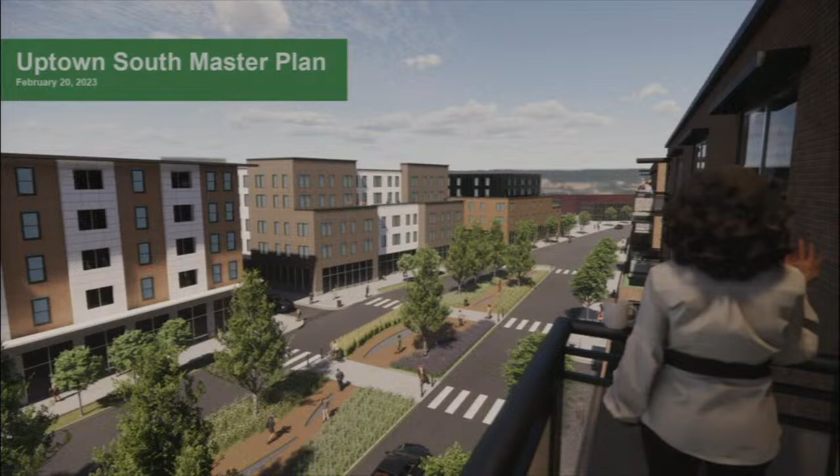For anyone who's been involved in the process to date, show of hands in the room, who's been involved in prior meetings? A lot of folks. How about first timers? Nobody. So everyone, this will all seem pretty familiar except for this cover rendering.

So we wanted to have some sort of image that described the public space, the principal public space that the plan proposes: 5-story buildings on both sides of a kind of divided parkway. And so you can see the rendering here. There's two women kind of waving at each other, balcony to balcony. On the right-hand side, the image is a little dim, but you'll see that again.

So I want to take you through seven items and then Q&A. I'll just take you through it. So the project background, I think this is known very well to people in this room.

There have been plans prepared for Uptown before it was called Uptown, starting in 1999 and 2000. They were updated in 2015 when a significant portion of the plan had been developed, but the market had changed, and so that was called Uptown 2.0. And then with the arrival of Rivian, the change in the economy, all kinds of things, it made perfect sense to dial in Uptown South again, beginning in 2022 and then sort of finishing this year.

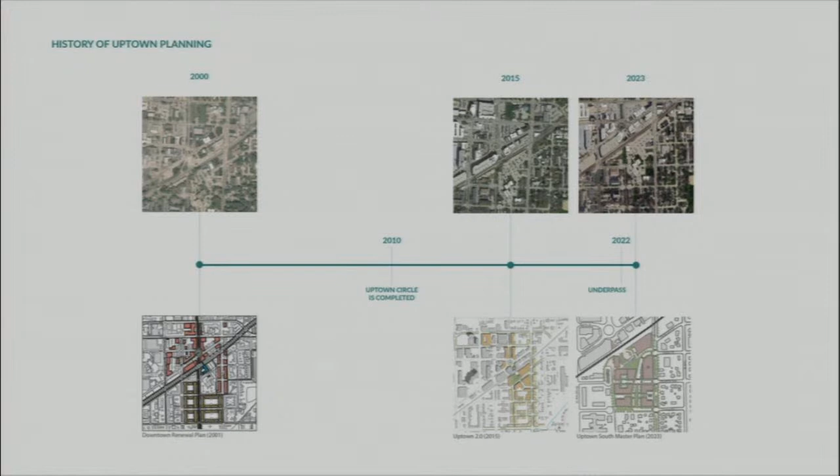So you can see the aerial photographs across the top of how facts on the ground have changed, as a result of the plans, and then the plans and their evolution across the bottom.

So sort of two big things to know is that, why are we here today? The 2015 plan called for the creation of an underpass, which is underway. It's being designed and constructed, and people in this room know far more about it than I do. What's most significant about it is that Uptown itself, north of the tracks, is fairly close to being done and complete.

With Trailside East and Trailside West, we're kind of running out of new stuff to do. So it makes perfect sense to extend Uptown to south of the tracks, and the underpass will do that in the most pedestrian and bike-friendly connected way. So it's pretty amazing feat that the town has found funding to do that.

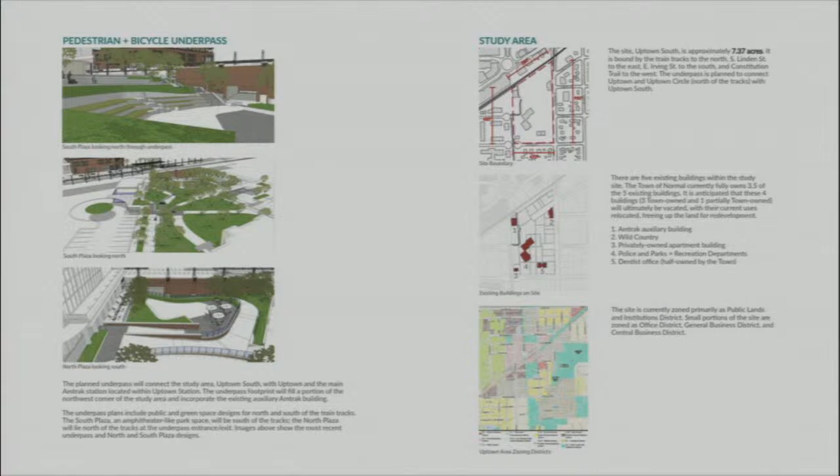So the study area pictured here on the right - the cursor doesn't really show it. Anyway, the study area is 7.37 acres, bounded on Linden to the east, Irving to the south, and Constitution Trail on the west. And it's got 5 buildings on the site, and we'll take you through all that.

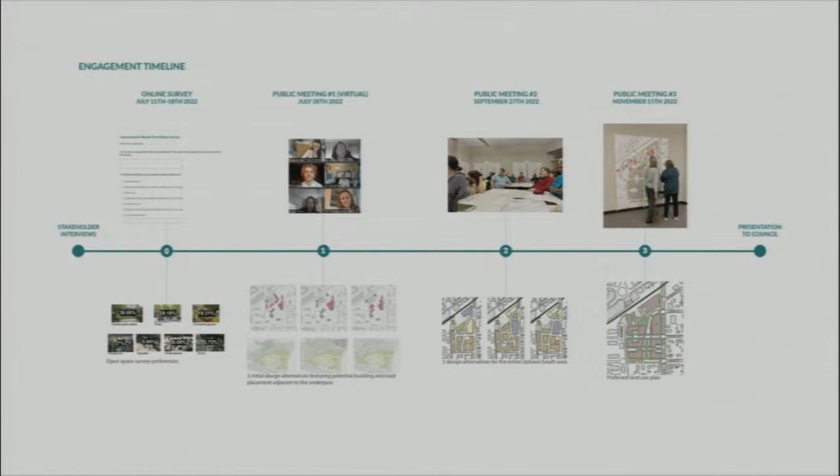Then in the virtual meeting in July, we showed 3 different ways to enclose space adjacent to what's called the South Plaza. In the September meeting, we showed 3 completely different schemes, and we got a lot of feedback, and people told us what was working and what was not, and then the November meeting sort of pulled it together.

So, market opportunities. We wanted to share that our sub-consultant, financial consultant SB Friedman, did a thorough market analysis, and we found pretty much only good news. The housing market in McLean County and Normal in particular is very tight, which is, if you're a landlord or wanting to build housing, that's a good thing. If you're trying to find housing, that's not a good thing. But prices are up to the point where new construction seems to be justifiable.

The job growth, as you know, from Rivian and suppliers and everything is on a strong trend. So anyway, the facts go, basically non-student rental units have been rented up almost instantly. The price to date at $1.79 a square foot is not quite at the $2 per square foot threshold we look for to justify new construction, but with the amenities that are proposed here, I think we'll get there.

There's lots of demand for housing, and then finally urban style housing—that is to say not detached single family, but typically multi-story apartment, elevator sort of buildings, and other missing middle types of buildings. So coming back at it again with multifamily, Rivian's added 800 jobs during the year 2022. The population is growing, trends are good, and student housing, if we wanted to go there, is also a further demand factor.

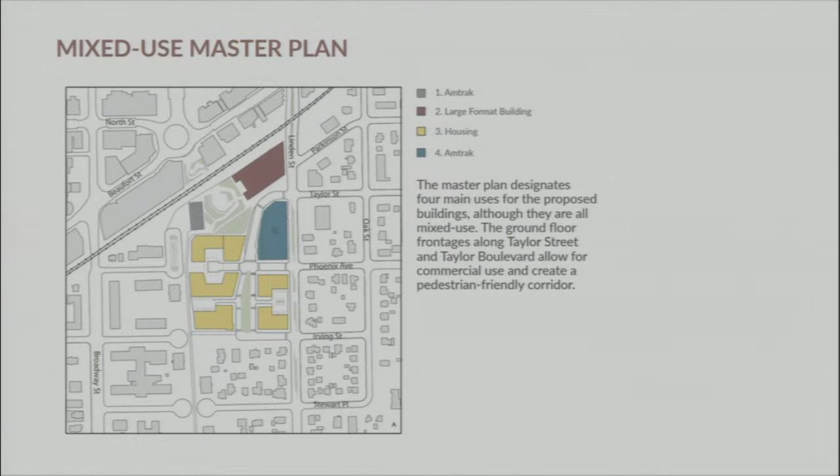The upper right we're calling the large format building, which is adjacent to the tracks, and we have 3 possible uses for it. The yellow is housing, and there's sort of mixed use and housing buildings, 5 of those over 2 phases. And then finally, mislabeled here as number 4, Amtrak, is really a mixed use parking structure. So that's the kind of blue there right off of Linden.

So the first one, the Amtrak building that's there can be replaced and intensified with a multi-story building. It's a very small footprint. It would happen towards the end of a phased master plan, but we don't want to miss the opportunity to call it out.

In terms of the large format building, we looked at it for 3 different uses. One is a large institution like a library, or potentially a retail space. Second is housing. And the third—Olivia, what is it? Different format? There isn't a third? Okay, just 2. These are all different configurations.

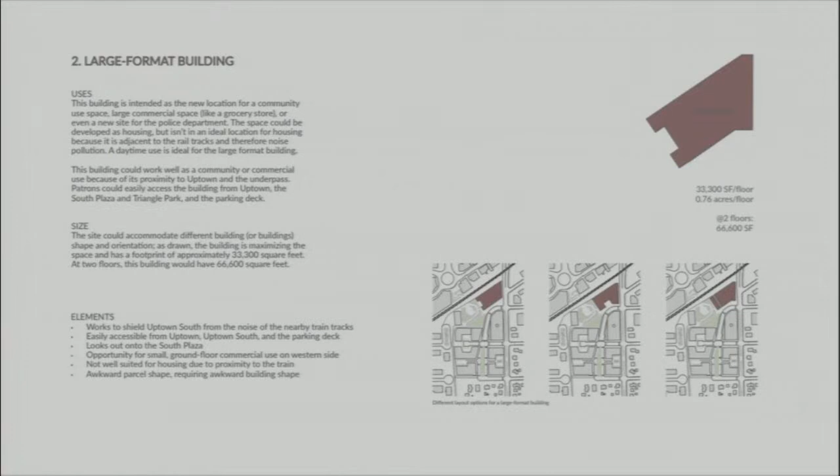So housing, 5 different buildings in L shapes or U shapes. They total across 5 floors, 402,000 square feet, which is a lot of square feet—so that's hundreds of apartment units. We are proposing ground floor retail uses, particularly facing the new boulevard, and then upper story housing. We imagine all of the buildings will be elevator served to meet accessibility requirements and just to meet the market.

We'll show you in a minute the 3 buildings on the left, that stack of 3 buildings there would be in phase 2, and those can only be built if and when the municipal building is relocated. And then the 2 on the right can be built anytime.

So parking is the 4th land use, and this one probably got moved around more than any other. It's this site adjacent to Linden that ended up being kind of the one that wanted to be there. It wanted to be really next to the tracks, but we could not figure out how to get in and out of it in any kind of sensible way.

We needed more points of entry in and out of the garage. It's a tight footprint, but it fits, with a little bit of room to the west for a liner building. You can see we've gone to the level of detail of showing where the entries and exits are.

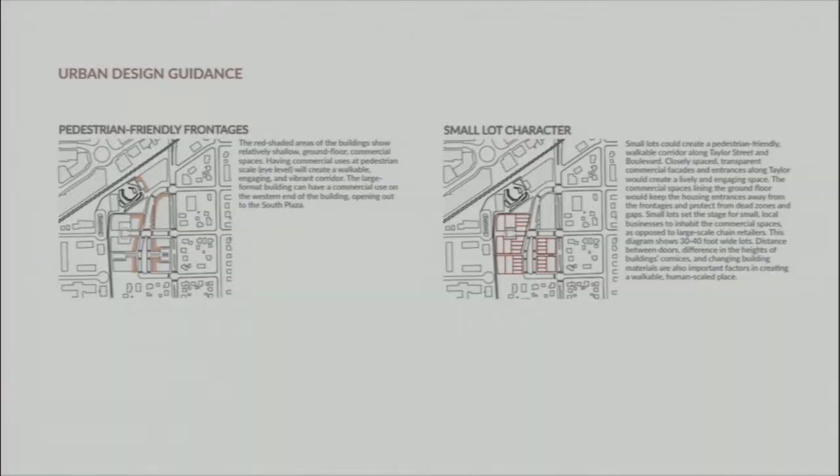On the right-hand side came out of the original survey from June and July, where we asked what the preference was: big buildings, little buildings, or middle-sized buildings like the fine-grained character of Uptown now, which was based on the idea of respecting the historic 30-foot parcels. So if a building has multiple facades, you're carving it up into smaller bite-sized bits. We propose that same thinking along our new north-south street, which needs a name—I'd name it after several people in this room, but it's not my call. We'll come up with some good names.

For open space, there was a lot of interest in getting the open space right. We worked with Jason Cooper at ECT Landscape Architects, and he did some lovely preliminary landscape plans for four open spaces. I'll take you through them one at a time.

Here they are in the upper left, numbered and named: the Triangle Park, the Taylor Boulevard Parklet—though I don't think we can call it Taylor Boulevard, but that's our holding name for now—the Courtyard, and then the Constitution Trail, Irving Street path.

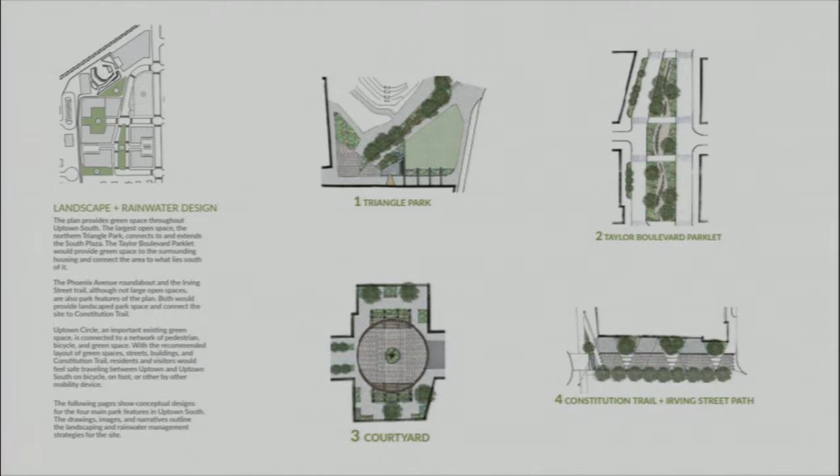First is the Triangle Park. Looking at the plan on the right, you can see the Amtrak tracks. The underpass project comes with a public space called the South Plaza, labeled there in small print. Below that low line of trees, kind of a hook shape like a Nike swoosh, is the Triangle Park. We took a very nice proposed public open space that's going to be built next year and expanded it by adding a triangular saddlebag shape on the bottom.

We envision this as a kind of multi-use lawn or flex space—sit, roll out a blanket, throw a Frisbee, walk the dog, all those kinds of things. Much needed in Uptown South, since there just isn't enough open space for everybody's enjoyment. So we're taking something great and making it a little bigger.

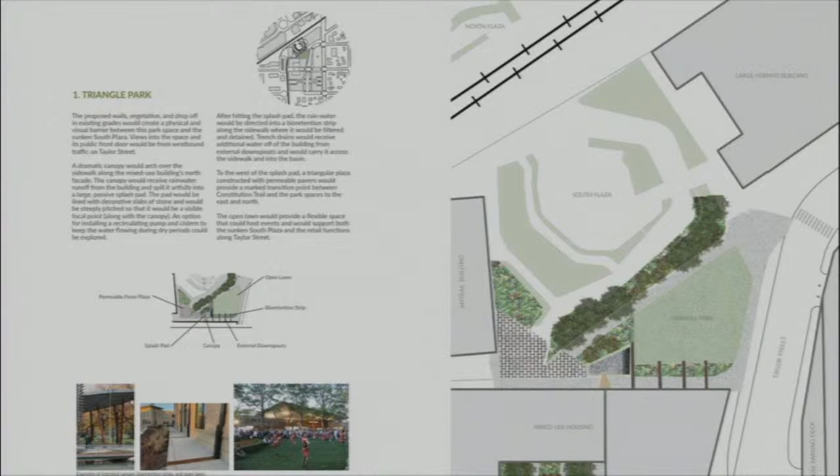Second, at the master plan meeting in November, there was a strong push for additional park space to the north as well as to the south. The one that made sense to the south is what we're calling the Parklet, the Taylor Boulevard Parklet. It's a divided parkway, not unlike Constitution Trail, but we widened the street to get adequate area in the middle.

Jason, the landscape architect, illustrated this with a series of trees, north-south pathways, bioswales, and rain gardens—you can see reference images in the lower left. We see it as a stormwater facility, continuing the legacy of Uptown, which is nationally famous for what it's done with stormwater. We didn't want to just make another circle and plop a fountain in it, but wanted to sustain those same values of stormwater retention and best management practices.

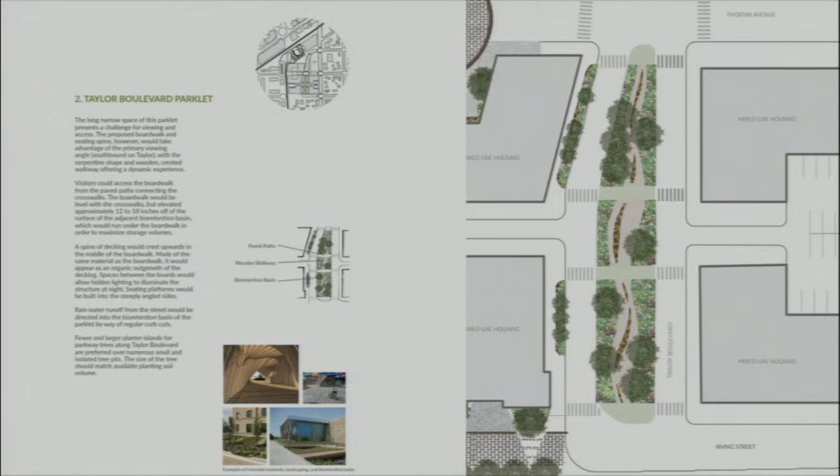That's that one. Number three, the Courtyard—rather than have just regular streets, it makes sense that the streets approaching Constitution Trail should go from vehicular streets to a more pedestrian plaza-like character.

So these two mixed-use buildings can only be built once the municipal building is relocated to make way for it. We've faced the two C-shaped buildings towards one another to create a common shared courtyard. This allows the town's standard for cul-de-sacs at 92 feet, which is about 42 feet bigger than it should be, but that's the law. So if the engineering staff wants a 92-foot circle, we've got one for you, but hopefully it'll be smaller. If an emergency vehicle wanted to come down this short, stubby street and do a 180, it could do so. So public safety is met, as is walkability.

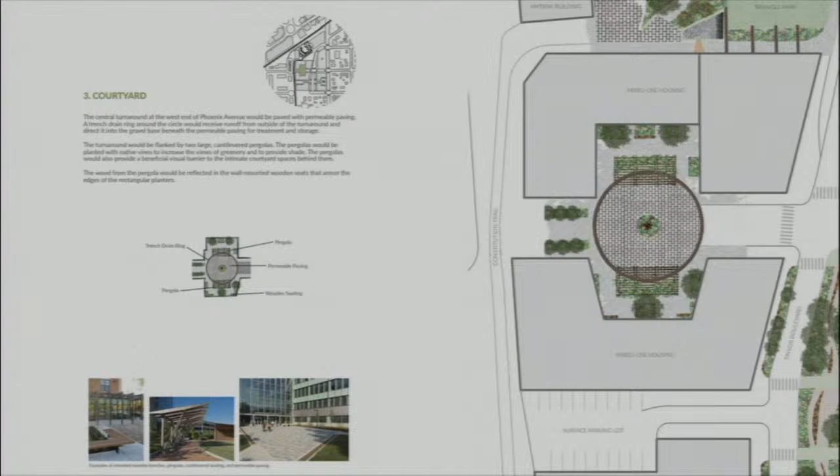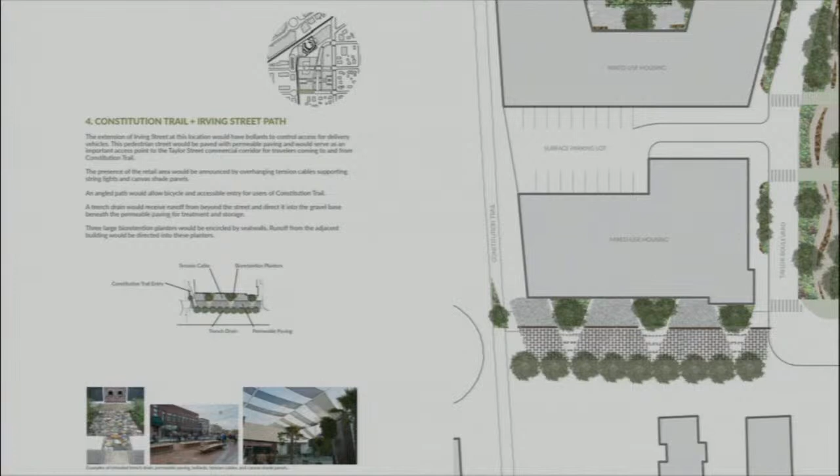And then fourth, the Irving Street continuation. Rather than run a street to Constitution Trail, we're proposing it as a plaza. It's a multi-purpose plaza so that vehicles can travel on it—a kind of pervious hardscape. We propose this as a pervious paver street so that it does a stormwater retention function as well.

So those are our four public open spaces. We can talk about those in greater detail if there are questions.

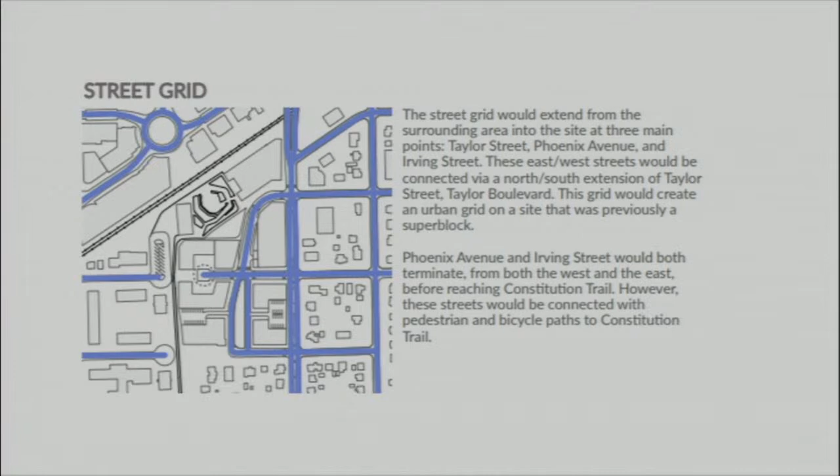Mobility: we worked very hard to integrate and connect to the street grid to the east. You can see we've got loop roads and two dead ends that approach Constitution Trail. We decided early on, and it was confirmed in the community process, not to encourage vehicles to drive across Constitution Trail. In the early phase, getting out of the police station, there's a cut across there, but I think it goes away or becomes minimal in the second phase. It's a nice extension of the street network, acknowledging that we really don't want streets crossing Constitution Trail. So that's the street grid.

Bike network—bikes are going to be key here. With the underpass, you'll be able to bicycle along Constitution Trail, come from the north, around the circle, duck under the tracks. You'll be asked to dismount, so keep it safe, people. Then you can continue south on Constitution Trail and feed into the Constitution Trail linear park on pretty much all of these streets. Some are dedicated bike lanes, some are share lanes, but we see it as a kind of walk, bike mecca.

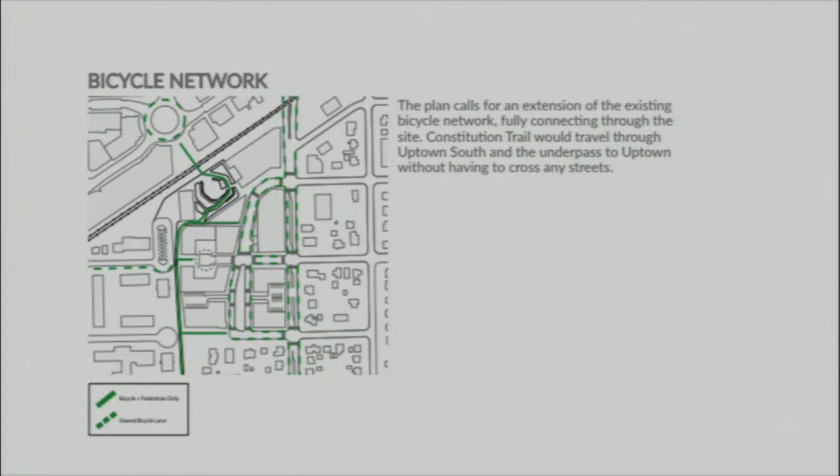Is the person that suggested that here tonight? Who was that? There she is—okay, Karen, thank you. I was thinking it was you. Thank you for that. That was great—and you introduced it like, this is a secret, don't tell anybody, I do this all the time.

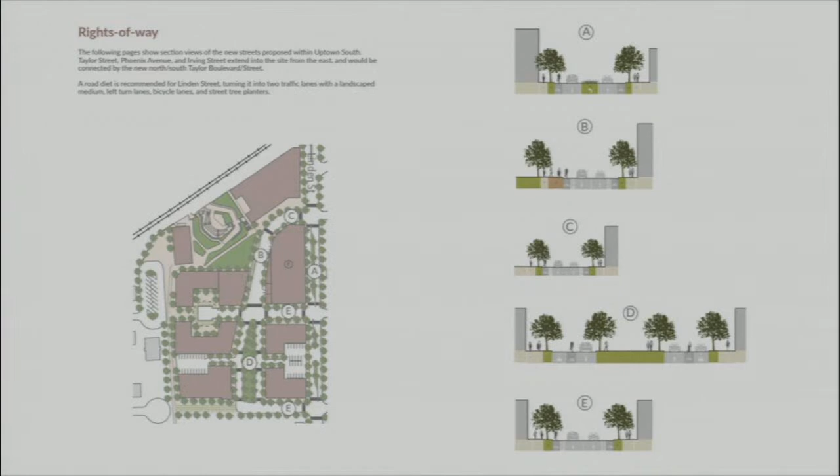So rights of way is the name planners give to streets and the adjacent public space. Here we've got 5 different ones. This is a callback to 2015—a certain council member reminded us it's important we not fail to repeat the recommendation from 2015 that Linden do what's called a road diet.

A road diet is a commonplace occurrence in municipalities that have 4-lane streets, 2 travel lanes in each direction, that more often than not carry the same capacity of traffic at safer speeds and with other amenities like wider parkways and/or bike lanes.

This is a proposal from 2015 we're reheating and representing. It's a really good idea, consistent with the rest of the plan. The existing conditions are on the bottom—4 travel lanes, 2 northbound, 2 southbound—and we'd replace that with this section on top, a center median with 1 travel lane in either direction. When there's a left turn, you interrupt that center median.

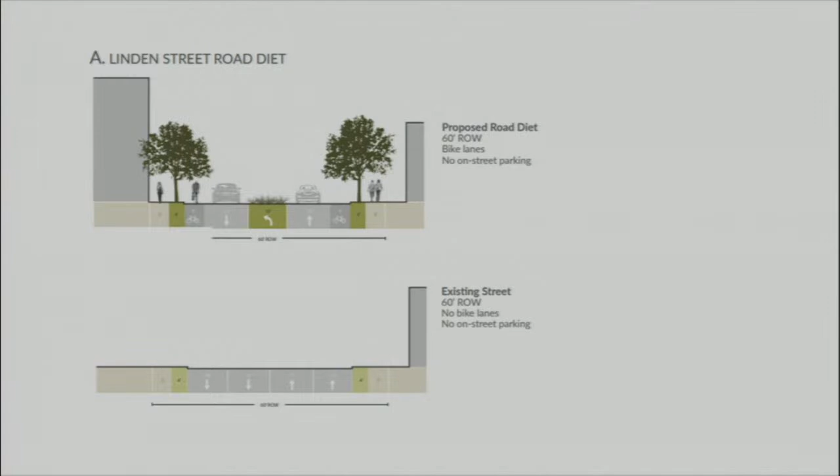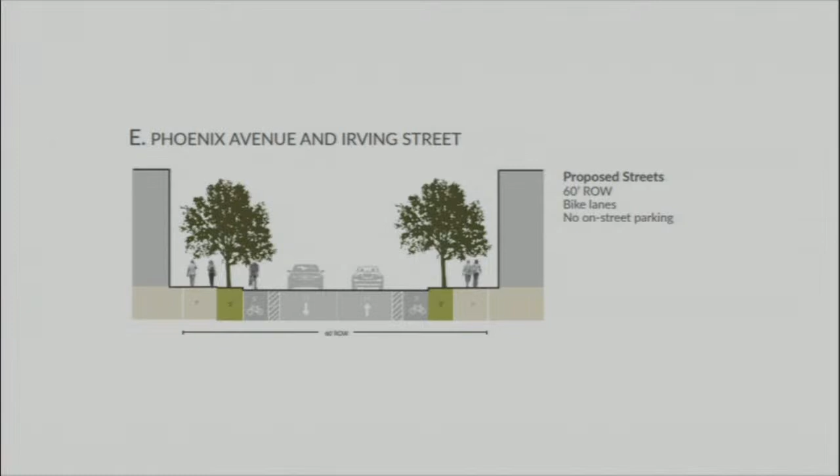So, road diet on Linden. Second one is Phoenix and Irving—we're basically continuing the same right of way. This is one illustration where there's dedicated bike lanes. I think there's an even better, competing alternative where we'd provide on-street parking again to support our storefront commercial and retail. And then finally Taylor Street, which is an east-west street that bends north-south.

We're calling it Taylor—that's not the right name. But basically, upper left is Taylor Street as we know it today. Upper right is Taylor Street with the drop-off. Bottom left is the divided Taylor Street, and you can see the parklet in the middle. We're allocating bike lanes, parking lanes, and bus drop-off lanes in those 3 sections.

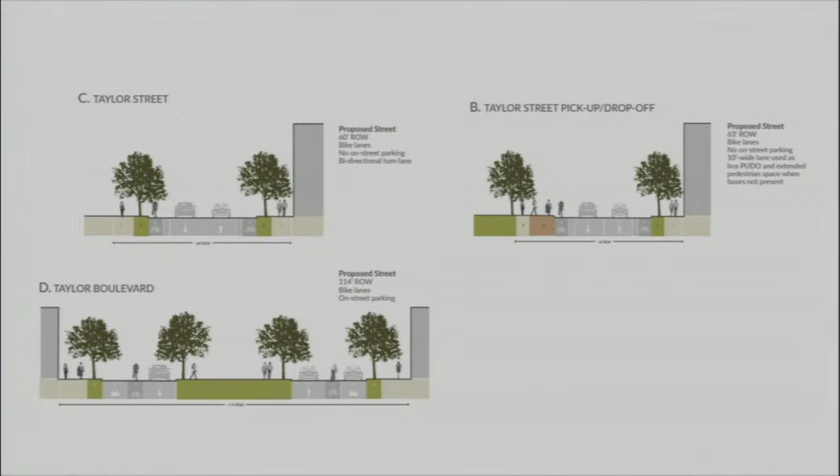And then sustainability—one of the things I'm always proud of in the plans and the leadership here in Normal is a focus on sustainability, which has put the town on the map in venues across the country. So two things, again, we're calling back recommendations from earlier studies. The 2003-2004 plan followed and met the LEED neighborhood development standard and was certified as such around 2004-2006.

So the plan we've prepared today repeats many and most of those principles from LEED-ND. We aren't proposing to certify, but we are following the rules, following the checklist. We've listed 9 different things we can point to and say we're doing LEED-ND—that's a callback to the 2004 study.

The 2015 study, Uptown South, proposed the creation of one ambitious green building—one that met the Living Building Challenge. I know there were some starts and stops on that with the library project, but we think that's still a valid recommendation, to find one of the buildings here to pursue that.

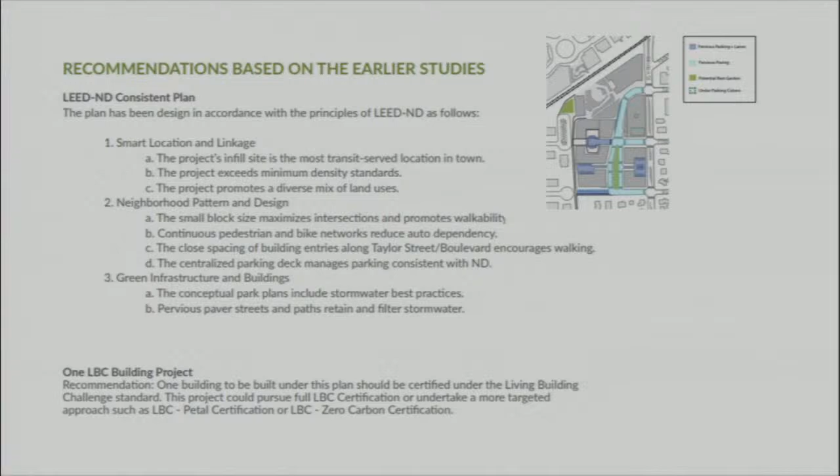Maybe we can talk about that in the Q&A, but I come back to it because LEED was the thing when the town required it—the first municipality to require LEED certified buildings in 2003. Wasn't in this council chamber because this chamber didn't exist, but it was this council that passed that back then. To sustain that leadership, the world has moved on past LEED—Living Building Challenge is it. We can talk about that.

And then what's new—what we've come back and are proposing, something rather ambitious. I don't think we've talked about this at all prior to tonight: the idea of all-electric development. With the climate emergency, climate disruption, give it the name you want, going on, I think we can all see the future, and I believe we need to figure out how to not burn fossil fuels as part of that future.

So from a municipality standpoint, when you're doing new development, one of the biggest decisions is whether that new development will be served with gas utilities. We are proposing that gas utilities not be extended to this area and that all the development be electric.

I'm sure we'll discuss that, but you're already the electric city. We didn't invent that - there's a company called Rivian that's been talking about that a lot. So we pair that recommendation with another: if you want to heat buildings in our climate with all electric, you're going to use heat pumps rather than electric resistance heating.

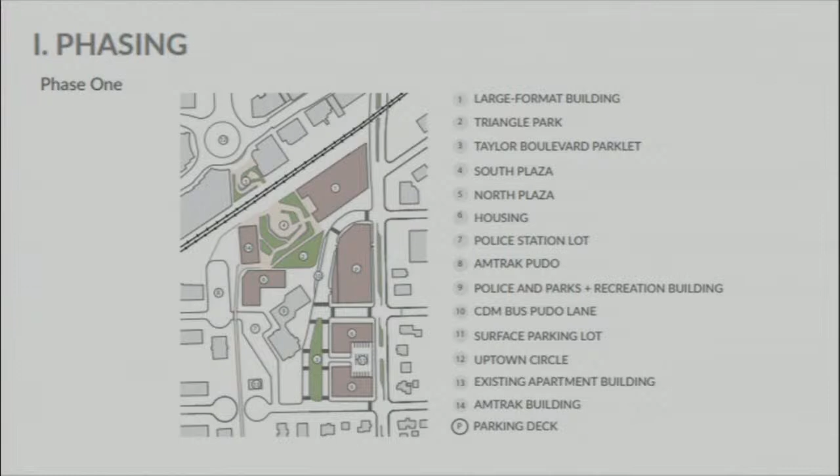Obviously the plan gets much better and more complete if that building were to be relocated, but anyway the phasing worked out wonderfully. So in the list of the projects, we can study that.

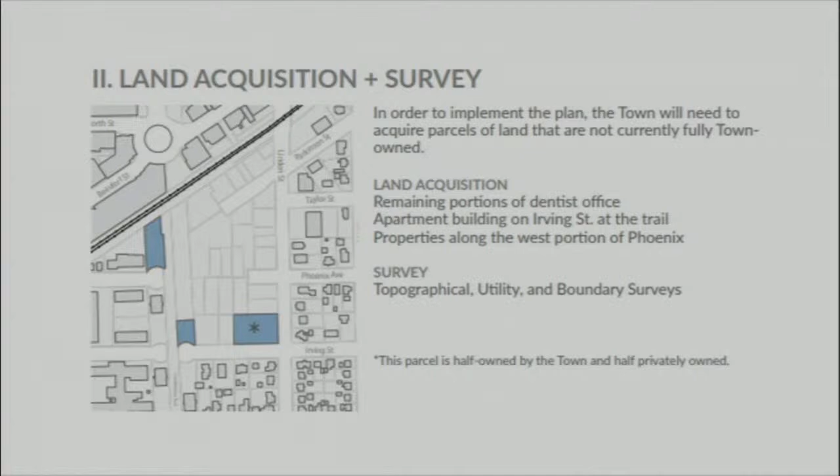In terms of sequence, there are a few parcels that are out parcels. The town does not yet control the portion of the dentist building - that parcel in the lower left - and then the proposed drop-off south of the track. So, and then of course surveying the land and consolidating it into a form you can then subdivide and zone.

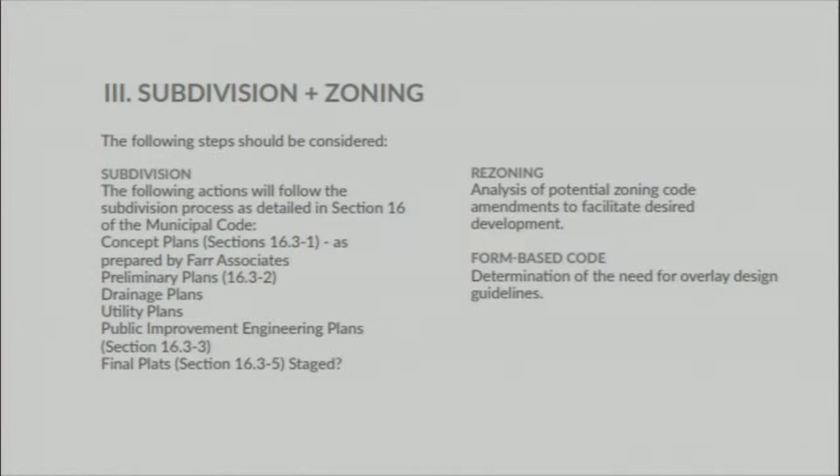Once the land is assembled and surveyed, we would subdivide it and zone it. And we're recommending, just because it's always good practice, a form-based code. Again, Normal is the leader in adopting that.

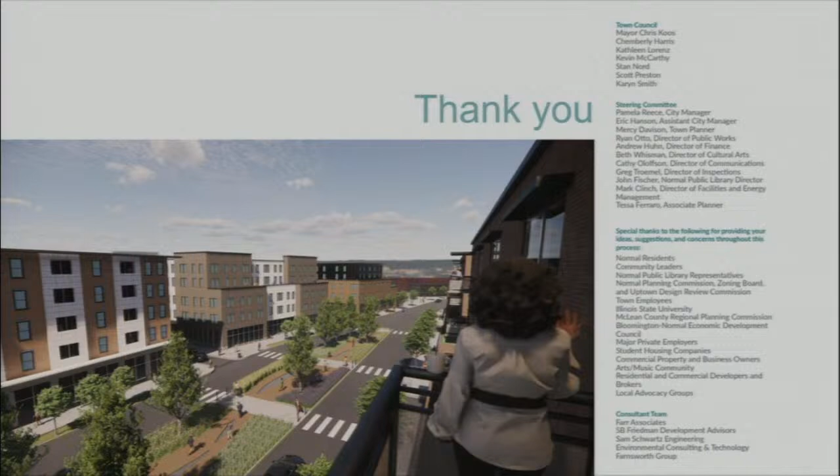29 minutes. Thank you, Doug. It was a quick run through there - you packed a lot of information in there.

Questions about anything, Ms. Smith? When you were talking about not allowing gas in there - not allowing gas utilities - yeah.

And making it all electric, is there any provision for the possibility of drilling down for thermal sources? Because following what Europe is going through with the cutoff of fuel from Russia, there's more exploration of that as an option. Does this plan have space to accommodate that? I know it's still costly.

Is that sort of geo-exchange heating and cooling? Yeah, so you can put that underneath buildings, so it actually doesn't take space. The town is creative enough to maybe even consider an easement in a public way, if you could sort out the utilities and not have them in conflict.

In our architectural practice, we did the first geothermal heated and cooled building in Chicago. It was the Chicago Center for Green Technology, designed in 1999 and opened in 2002. And we did geothermal off and on through about 2016.

The heat pump technology for air-to-air heat pumps has gotten so much better in that time, and the economics of drilling down and doing those wells has changed, so we do it less and less frequently. Mitsubishi has introduced something called the Hyperheat heat pump, which is suited to our climate. Prior to that, we were all using kind of warm weather heat pumps and hoping for the best in the winter. They're rated for -13 Fahrenheit, so that's a pretty cold winter day. We think you can get away without it.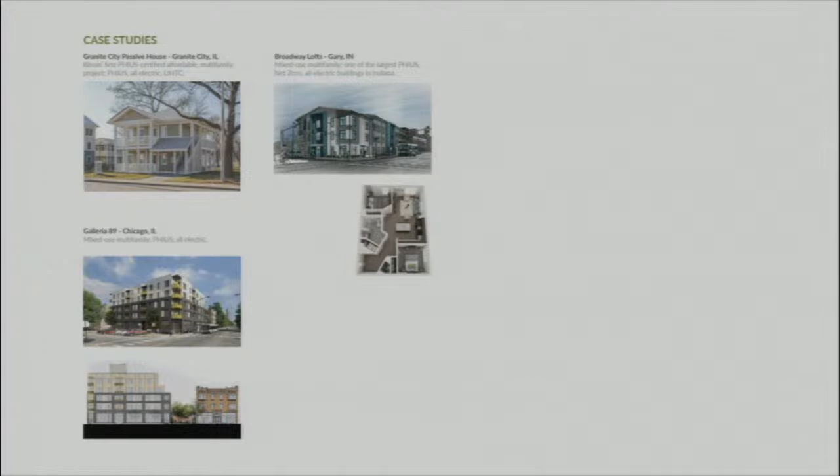So we're not doing it in—actually let me take that back. The one on the upper left here did do geothermal heating and cooling, or geo exchange. The other two did not. So yeah, there's room for it.

I'd add too that I've got heat pumps in my house. It's a long story, but a couple of years ago when we had the big freeze, and it was like 18, 19 below, I was getting heat out of the heat pumps.

Are there any businesses that we've solicited to be anchors or to come into this area? No, that wasn't part of our scope. SB Friedman did a market analysis to figure out what there was demand for, but their scope and our scope didn't include any tenant solicitation.

So this is all pure speculation? Well, no. A market study is not speculation, it is reasoned analysis by a highly esteemed professional consulting firm. So it's not speculation, it's a report. If we build it, it would be built on speculation. Well, based on input. I don't mean to be combative, but I disagree. If you consider building an apartment building in the strongest rental market and not knowing who's renting unit 4B speculative, then yes, it's speculative. But apartment buildings don't usually identify their tenants before they're built.

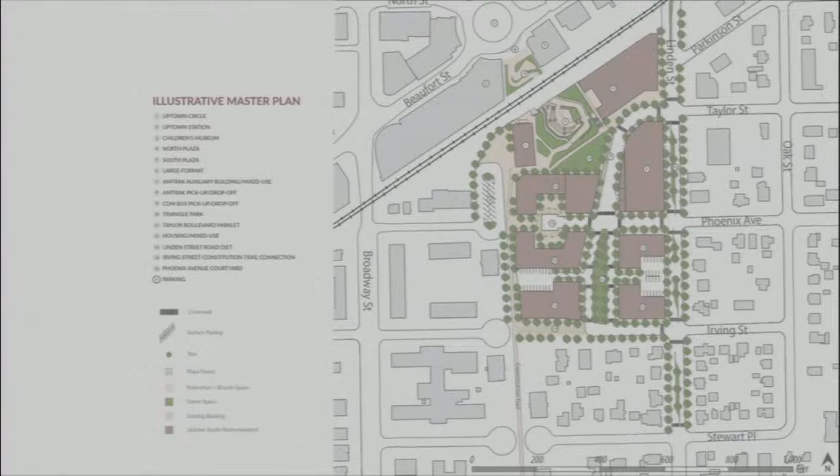Thank you for the presentation. It's exciting to see it reach this point. We've been having the south of the tracks, then Uptown 2.0 conversation for a very long time, and to see it to this point is exciting, frankly.

Good, agreed. For those watching, this isn't exactly what will happen. This existed when Uptown was first getting redeveloped, an idea of where things are going to go, and a whole bunch of citizen input telling us what they'd like to see and how they'd like to see it come together. Then some very astute professionals, experts at what they do, advised us about the types of development that could work and succeed in the area. So there's a whole lot of local input and expert input going into this.

Just to summarize, I had some of the questions that Mr. Preston already talked about, but my overall impression was that most of the residential is served by on-site parking, and whatever mixed use on the bottom floor would be principally served by that parking structure. Is that generally the concept, or did I have that backwards?

Councilman, I might reverse it. If the commercial at grade is more of a retail function, you want some immediate sort of impulse on-street parking, regulated to make sure people don't hog spaces, and depending on the business, you could run in, do your business, and get on. So I'd say it's the overnight guests, assuming it's mostly residential, but there could conceivably be live, work, or office uses too. Those cars would be parked in the deck when you're staying a long time. The little bit of incidental off-street parking is just good practice to have on site, for deliveries, ADA parking, things like that.

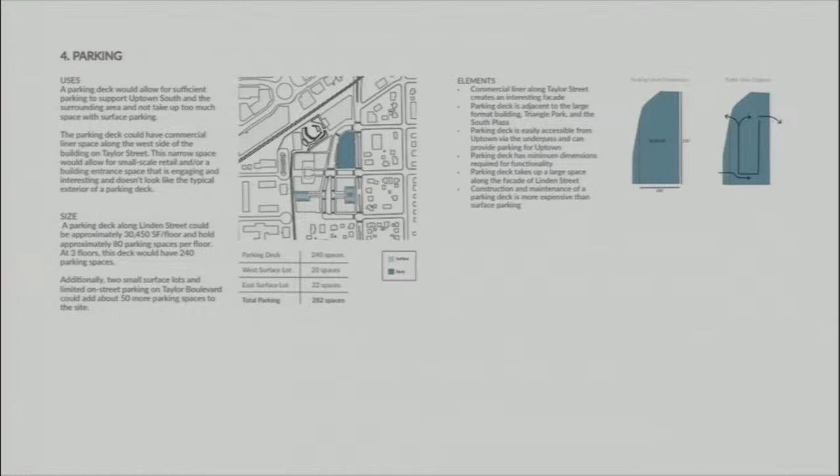If we wanted to make the parking structure taller, once it's working and the ramps are going, you can basically add 80 spaces per floor. So if we wanted 320 spaces in the deck and another 42 elsewhere, we'd be right at 1-to-1. So if the concern was we want 1-to-1, we could build it.

I think it's an interesting conversation to have with this audience, because of all the parking decks built as part of Uptown Original, we've learned it's not unique to Normal—people don't find the spaces on the 3rd and 4th floors of the parking deck as quickly as the ones found via loop-de-loop-de-loop. People will look 15 minutes for anything at grade, and then not want to go up there. So there's a diminishing utility to building things that people can't see. You could add the extra floor to feel good about it, but I don't think it would be a return on investment.

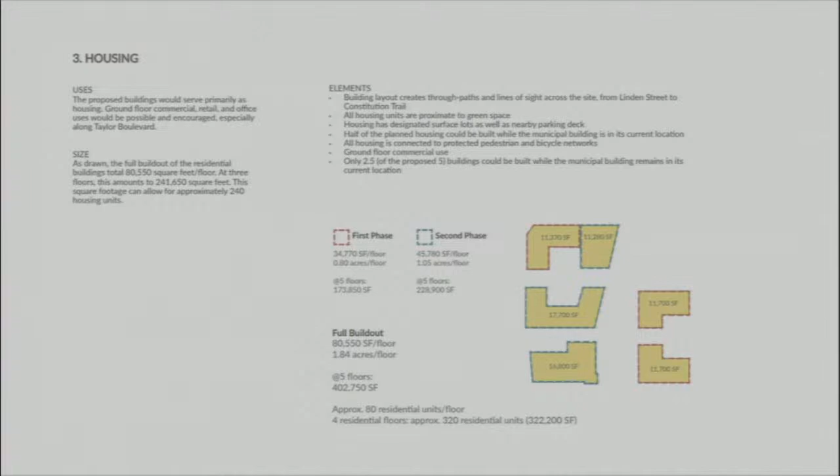Thank you. No, I'm not suggesting a direction, but I appreciate the feedback and the insight on that. I feel like I'm commenting on something you as an expert know far more than I about, but certainly urban development and the young people being attracted here are very interested.

I ran across a young man newly here from LA, and he loves our community, loves our Constitution Trail, and is appreciative of the transit system such as it is. He doesn't own a vehicle and has no intention of it, being used to the LA situation, but uses all the other amenities like Uber and Lyft that avail themselves here. He just doesn't want to buy a car. I think we certainly have to plan for that and design in that direction.

If I may, it may seem like a stretch, but we worked on the master plan for the Googleplex in Mountain View, and I think of Rivian as kind of in the family of tech firms. It's completely routine there that if there was a pocket of Rivian employees that need to get 4 miles away to a certain Rivian facility, they'd figure out vans or buses to get them back and forth, and no one would touch a car to get to and from work. That's completely routine. So we could overbuild spaces if we didn't coordinate with the principal employers.

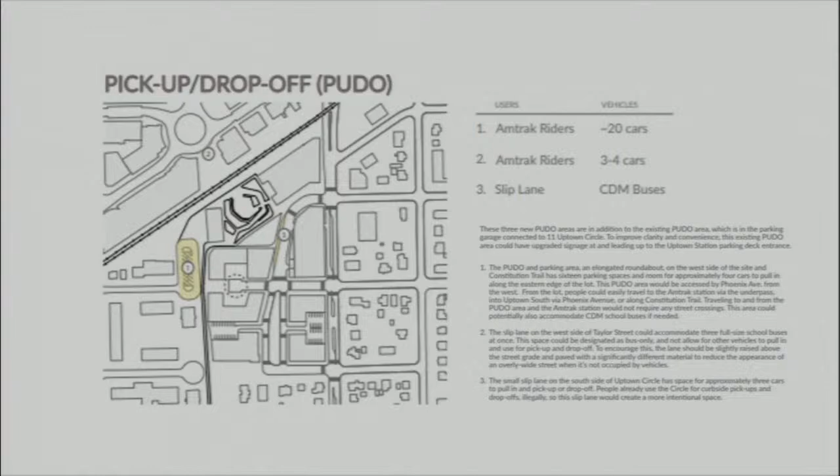Just a general comment more than anything else, and I don't know if staff could speak to this, or at some point this could be brought to our conversation. One is, I'd like to see—I don't think we've seen the results of the parking study that's been done recently—so I'd like to see that overlay the results of a recent parking study on this, because parking is and always has been an issue for Uptown, real or perceived. So I would very much like to see that in conjunction with this plan.

And then the second thing is, can anyone comment as to whether there's been at least some preliminary interest from developers to the point raised earlier about would this be market driven? The answer is yes. And to what end have we begun to hear the phone ringing, perhaps?

Well, I can say that we have not had any preliminary detailed discussions with any prospective developer. Everyone's kind of waiting for the plan to be rolled out today. We did have individuals participate in the various public input processes, including housing providers of various market rate and affordable and other things. So there are people we invited to the table that we knew would have an interest in this plan, and they offered input, and I think they're waiting to see this result. It won't be until after council adopts the plan that we start to pick up and run full speed ahead.